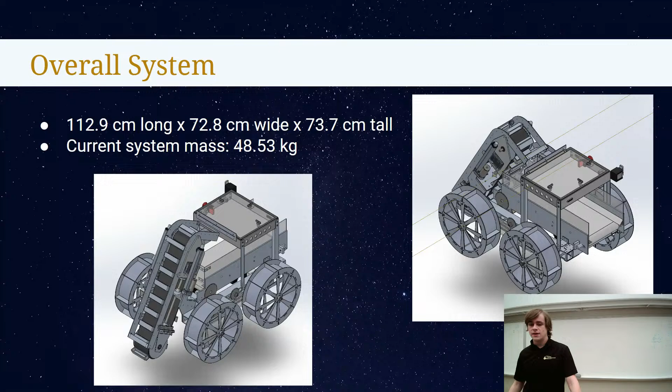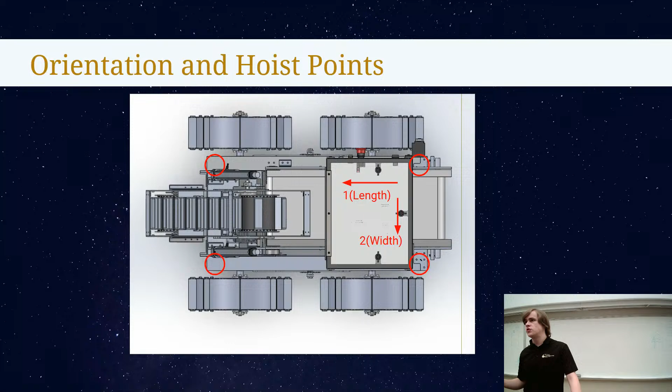Now the orientation and hoist points: the two arrows indicate the directions of length and width on the robot as required in the NASA rulebook. So length is going to be parallel to the wheels, and width is perpendicular. Also circled in red are the 4 hoist points for the robot. These will be installed with eye bolts, and then we'll have clips inserted into them to lift the robot, as was in last year's design.

And then one final note on the high-level robot overview is that we have new motors this year, which require special dust protection, as the integrated motor controllers are not sealed against dust in the way that we need. So this is going to be accomplished with two-piece 3D printed motor covers. They're going to have an XTC 3D printing coating applied to them to smooth them out and seal them.

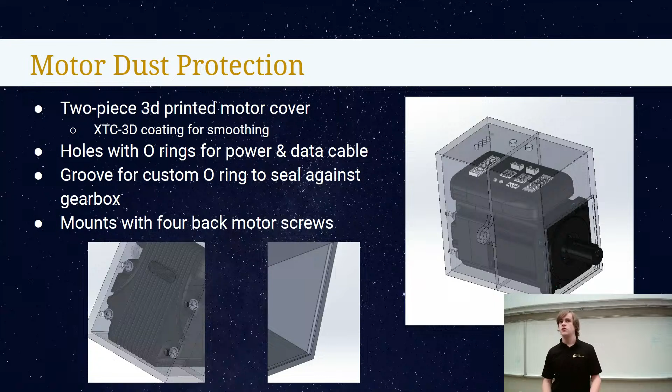There are going to be 6 holes for the required power and data cables, and we're going to have O-rings inserted into grooves such that the cables can seal against the O-rings. And then there is an additional groove in the front for a custom O-ring, which will be sealing against the gearboxes in order to seal off the entire interior of the motor, and then it'll mount at the back with the 4 motor screws, the same motor screws that hold on the motor controller currently. So with that, we conclude our high-level robot overview, and we can now move on to systems.

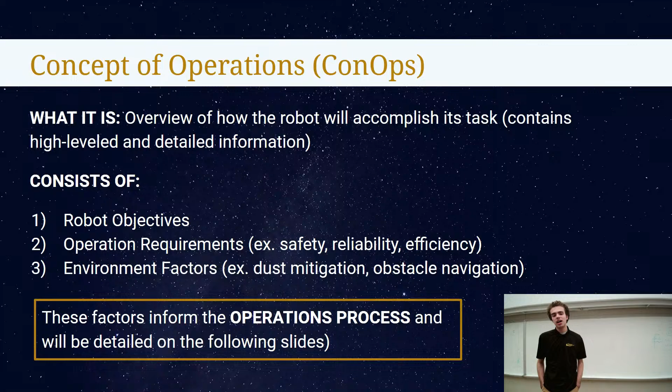Okay, so the first thing we're going to talk about for systems is the CONOPS, the concept of operations. This is an overview of how the robot will accomplish this task. It consists of the objectives for the robot, the requirements the robot must meet while achieving those objectives, and any environmental factors that will impact the objectives and the requirements. These all inform the operations process, which will be detailed on the next few slides.

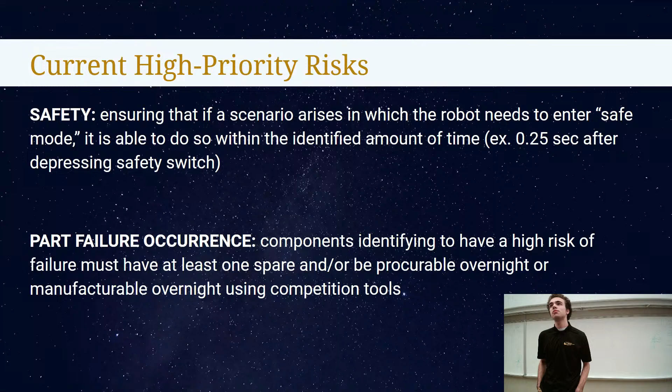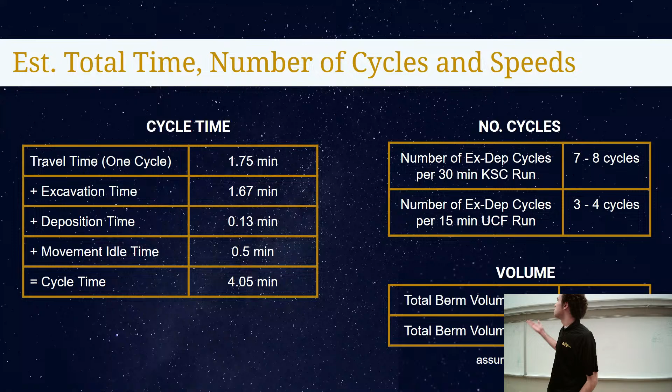You can see how that translates into how many full cycles we can do in a cycle - going to the excavation location, getting regolith, bringing it back to the deposition location. You can see how many cycles that translates to for both the 30-minute KSC run or the 15-minute UCF run. And if we assume about 10 liters per cycle, which would be about half the total volume of our regolith storage, you can see how much volume of regolith would be deposited.

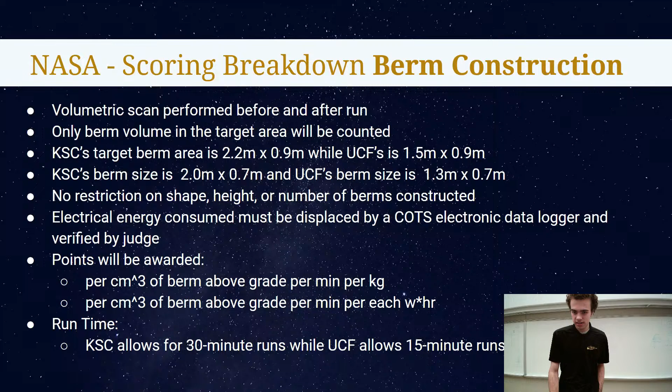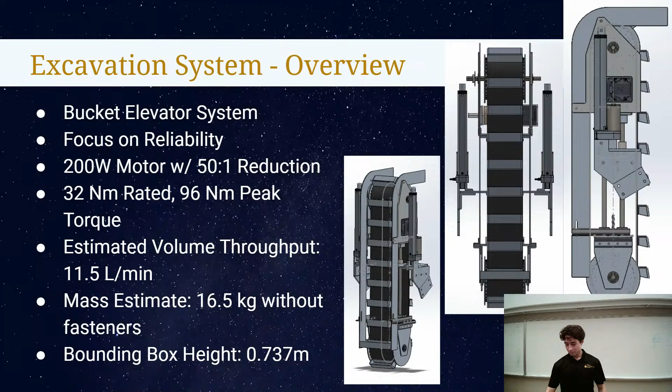Now I'd like to speak a bit about our structural design. We're going with a 3-rod structural design. As you can see in the bottom photo, we have 3 rods spaced apart in a triangular pattern. This has worked out really well in the past; our system hasn't had much rigidity issues with the rods, mainly because they're made out of steel, so no deflection of the rods.

One thing we're changing this year is we decided to spread the rods further apart, mainly because last year we were experiencing some bending in the top plate. So we're moving those out this year. That should fix the issue because most of the load on that top plate is near the outer edges, and by placing the rods closer to the load, it should reduce the stress and bending on that plate.

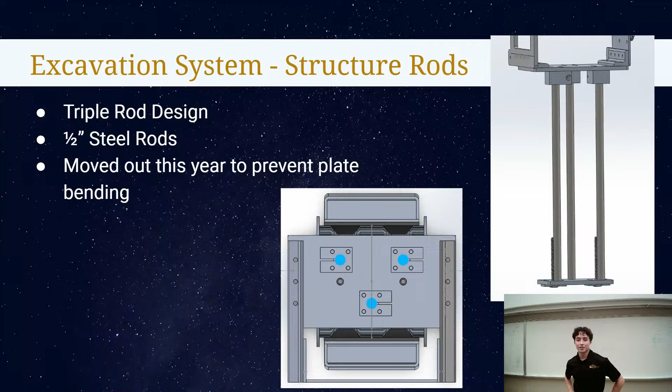When we wanted to move the 3 rods apart, we incorporated all of our parts used in previous years to support the rods. However, these supports that guided the rods were a little too big and had too large a radius between the screws that went into the plate. Because of that, we needed to redesign those, so we went with custom rectangular supports that bring the radius of the screws closer to the plate and have a smaller radius, utilizing a set screw to hold it all together.

We also changed the pancake tensioner this year. It's fixed on the bottom, a screw fixed on the bottom with 2 guides that fix the rotation of the rectangular screw head. This is different than previous years, because previously we had to get a grip on the screw and a nut to tension a pancake tensioner.

This year, fixing the rotation of the screws and having 2 will not only increase the amount of force we can apply, but it also means instead of having to finagle our way into the robot to grasp both the screw and the nut, we can just screw the nut from the top, which should make the entire process easier.

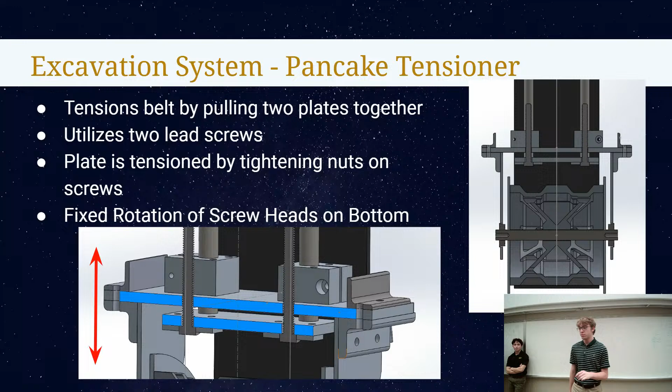All right, so this year we are moving back to a bucket elevator. So for that, we need buckets. Our plan is to weld two different pieces of sheet metal or L channel together.

We have an L channel, which will be 1 inch by 1 inch and 1/8 of an inch thick. And we'll have another piece of bended sheet metal that'll have 2 bends on the sides and is also 1/8 of an inch thick. These will be welded together at the bottom of the L channel, as you can see at the bottom of both pieces, and then at the back side.

The entire bucket will be about 1.2 inches by 1.1 inches by 4.5 inches, and it'll be fastened to the belt with bolts.

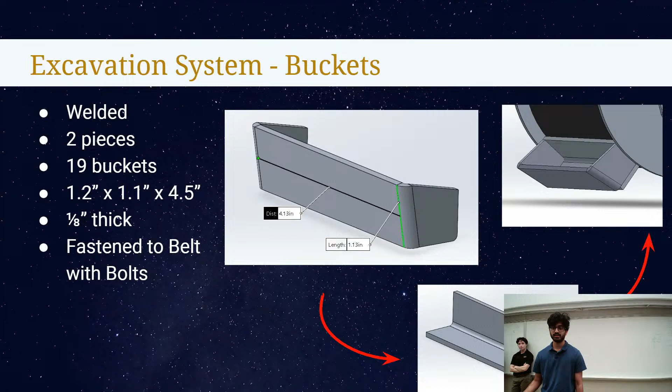So new this year, we have a dust cover on the excavation system. This is to prevent dust from being spewed about. With the bucket elevator this year, since we're going to be running it much faster than we have in the past, it will require more protection to prevent dust from being spewed all over the place. In addition, it also prevents debris from being shot out of the back, so it's helpful for safety and for preventing things from getting damaged.

Additionally, we have 2 parts of it. We have the frame, which will be what connects the dust cover to the actual excavation system itself, and then the actual cover will be made of a nylon fabric. We decided on using coated nylon because we went through a bunch of different fabrics, and we were like, okay, which one has the strength that we need and is resistant to abrasion and tearing and all of this. We settled on coated nylon because it just was the best of the options that we looked at.

So with the frame being connected to the excavation system, it will be connected at 3 points on the top, middle, and bottom for stability. Each one's going to be fastened with an L channel and then screwed in. For the actual cover itself, we're going to be putting some holes into the fabric and then creating eyelets, which will then go on top of holes on the frame, which would then be fastened using rivets.

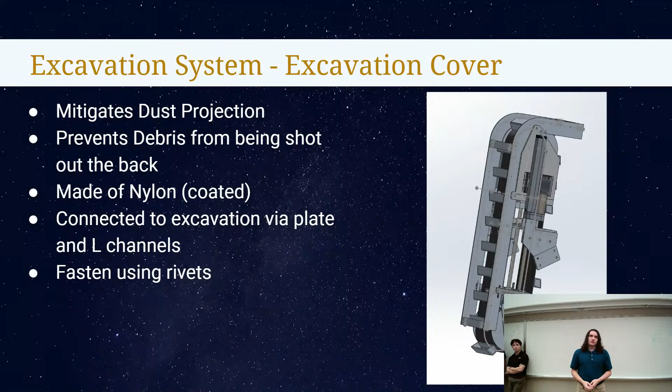All right, so in terms of our actuators, we are using linear actuators. We have 2 of them in our system, and they're going to be the same ones that we used in the past years. Each of them have 8-inch strokes, and they're both rated for 50 pounds of force, which means in total we have 100 pounds of force for our system.

The system will be actuated into the ground, so kind of expected out of excavation. The major changes we're doing this year in terms of our actuators is how we're mounting them. In past years, we mounted our actuators by seating it through the support plate, and it was held in place by a pin, which proved very difficult to reach and actually secure.

So this year, instead of that, we're going to be securing it on top of the support plate, and it's going to be fastened between an L channel and then an extension of our side support plate on the excavation. And that pretty much wraps it up. I'm going to pass it along.

Okay, so now we're moving on to our DFMEAs. We evaluated various failure modes of our system, and I'm just going to go over a couple of them that I think are pretty important.

So first, I'd like to go over the buckets and what may happen with them, especially with the welds we're doing this year. We haven't proven the welds yet, and we don't know exactly how strong they are. They should be strong, but it all depends on our welding skills. So we're a bit worried about the buckets possibly deforming or the leading edge maybe falling off.

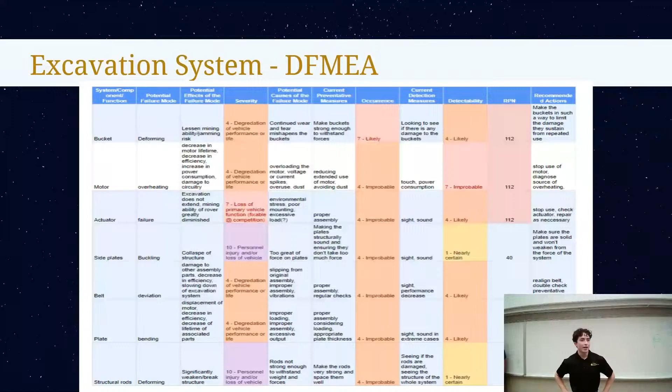And to wrap up with our priorities moving forward, first, we will implement the feedback from this design review. That'll be a main focus between now and the next one. And then we'll also be working on dust covers since we don't have those done yet. And also inserting fasteners, exploring more weight-saving options. And then we're gonna start running our mining force experiments and then start experimenting and training with welding the buckets. So that pretty much wraps up excavation. So now I'm gonna open up the floor to any questions.

We have one question from YouTube right now, and they're asking if we have any plans to do any destructive testing with extra buckets, to get an idea of when the buckets will likely fail. So the question was, will we do destructive testing on the buckets to figure out when they fail? It is something we can explore. We haven't done that much in the past, but we do have a lot of manpower this year to try and work on that. And maybe it's something we can do alongside our mining force experiments. So I'd definitely like to explore that this year.

So for your buckets, first of all, what alloy are you thinking for your 1/8-inch bends? So the question is, what alloy are we thinking for 1/8-inch bends? So the buckets will be made out of aluminum 6061. I've gone and asked the people at Bechtol's Hot Works to see if it was actually possible. And they said that aluminum welding is actually possible on 1/8-inch. They gave us some feedback on our design and we implemented that. And they said it's possible and shouldn't be too hard. So I'm not too worried.

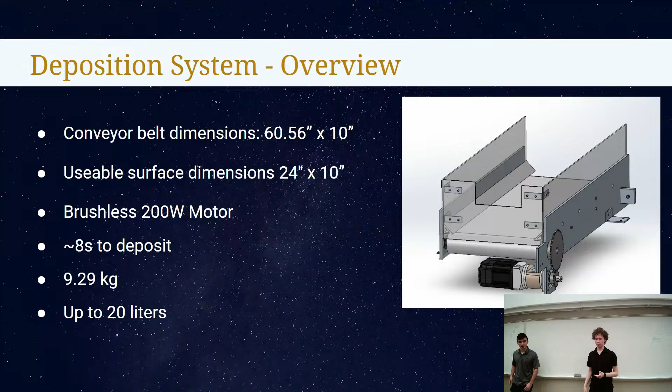Hello. So for this year, we decided to completely redesign the deposition system from scratch and replace the old deposition system with a conveyor belt. Dimensions of the conveyor are going to be 60.56 inches by 10 inches. The usable surface which regolith will be deposited on will be 24 inches by 10 inches. It will use a brushless 200 watt motor and take around 8 seconds to deposit. The current weight of the system is 9.29 kilograms, and it can hold up to 20 liters of regolith.

So for the structure of the deposition system, we have a couple different walls. The darker gray walls are 1/4 inch aluminum, which provide the structure. Everything is attached to them. The pulleys are attached to them, and the other walls are as well. The motor is in the bottom of this picture here. We're going to have 2 pulleys and then 2 idle rollers in the middle there. And then one is going to be an active pulley with a motor.

There's going to be 3 additional 1/8 inch polycarbonate sidewalls, which are just meant to keep the dust in, not actually bear any weight, so they don't have to be super rigid. We're also going to have 2 3D printed triangular ramps. We're going to show those in the next slide, but those are going to keep the dust from falling through the outer edge of the conveyor and hopefully funnel it into the center of the conveyor so it doesn't get lost.

So the triangular side ramps are basically 3D printed pieces of plastic which will be covering just above the surface of the conveyor belt. This way it will hopefully prevent the regolith from getting lost through the gaps on the sides of the conveyor belt and prevent any friction of the conveyor belt with the sidewalls.

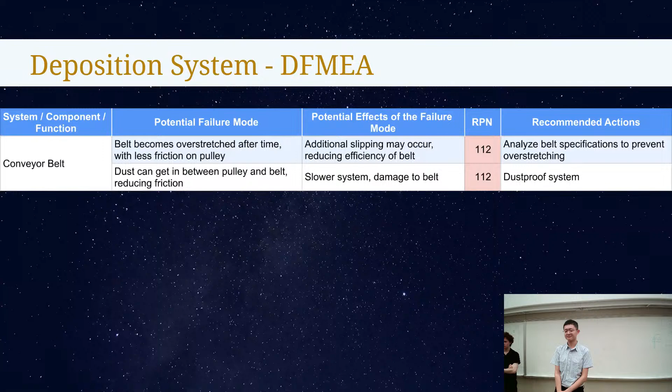So priorities moving forward are to optimize the triangular side ramp for 3D printing by breaking it into multiple parts which can fit on the 3D printer bed. Another priority is going to be dust mitigation and dust protection. We will design dust covers for pretty much everything and analyze what else can be done to prevent regolith from damaging the system.

We will also implement weight reduction measures, research the possibility of active dust mitigation, and start preparing for manufacturing by inserting fasteners, choosing our parts, making plans and optimizing for manufacturing. We will also research alternatives and look into custom manufacturing for some of the parts, mainly the driving pulley, because it's pretty expensive as we have it configured right now. So we might make it custom or see if there are other suppliers with better pricing.

Does anybody have any questions? Peter? A couple questions. First, the triangular side ramps, how long are they? They go through the entire length of the robot. We might make them even longer. In terms of length, they're 24 inches long? Yeah, 24 inches long. Okay. Do you plan to split that up into multiple pieces that are connected together? Yeah, basically, we'll probably split them into a few pieces, which will be 3D printed separately, and then connected together. Okay, good.

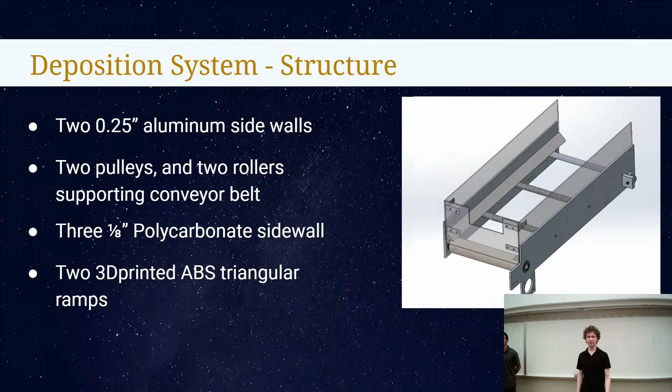Hans? Can you go back to the custom pulley tensioner? This one? Yes. So is that bolt just pushing on the axle for the pulley, or is that actually threaded? It's not going to be threaded into the shaft. The shaft is just going to have a flat side where the bolt will push against, and the block is threaded.

Max? Yeah, 2 things. First, with that ramp at the bottom of the triangle and the belt, what is the distance that you plan to have? Is it going to sit right on top of it, or how much clearance are you going to design? We're currently at maybe 1/8 of an inch, potentially slightly lower or higher depending how the testing goes. Since it's 3D printable, it's very easy to adjust by just shifting the location of the heat insert.

Okay. Yeah, because keep in mind that if it's too close, you'll have the belt rubbing up against it. And so if it's intended for that, if you want some sort of seal, you might need to do something to make sure that it doesn't have excessive wear on the bottom. If the distance is too wide, then you won't have the benefit of the sealing. So maybe that might not be the solution you need for that. But okay, that's good to know.

And then the second thing is, how do you plan on assembling the system together with the rods in the center? What's that looking like? Do you have an idea? The question was how we are going to assemble the system with all the rollers and pulleys in the middle. So the idle pulley and the driving pulley are using shafts, which will be inserted through the holes in the aluminum sidewalls. And for the rollers, they're a spring-in installation method, so you can just push the sides of the shafts into them and just slide it in.

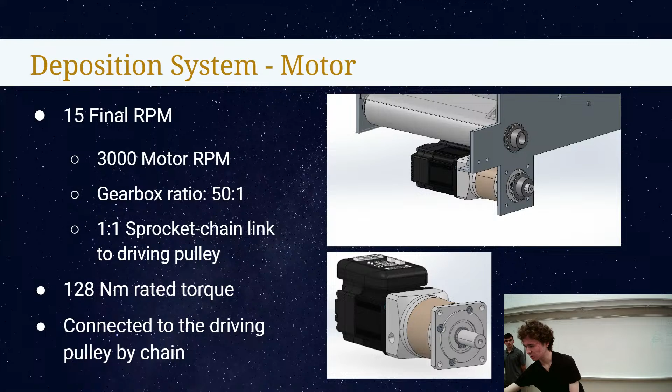Also, the picture's a little, the actual pulley that's on it. Yeah, the actual pulley is made invisible in that picture. So I'm gonna see if there's any other picture. I don't think there's better pictures than this. But in the back, there's an idle pulley with built-in rollers. So we will probably build something around there.

Any more questions? What's the thread size on that tensioner screw? Right now it's 10-24, but we might change it later.

Any other questions? Peter? Yeah, can you go to the back view of the system? Like the back view, yes.

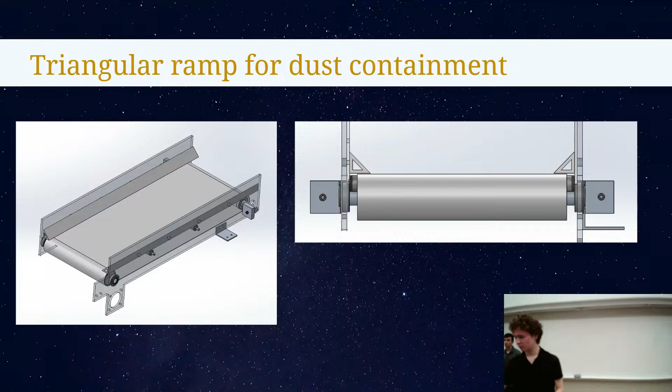So it looks like right now you have about a half an inch gap between the belt and the sides of the wall. Is there any particular reason for that, and could you make it smaller?

Main reason is the pulley, the idle rollers are designed to be wider than the belt. Both rollers are designed for an 11-inch gap, while we have a 10-inch belt, because the other size would be too small. Another reason is to prevent friction of the belt against the sidewalls, and we're going to use triangular side ramps to keep things aligned and compensate for those gaps.

Alex? So if there's a gap on either side of the belt, do you have a way to prevent the belt from moving left and right? We will connect something to one of the pulleys to keep it in place.

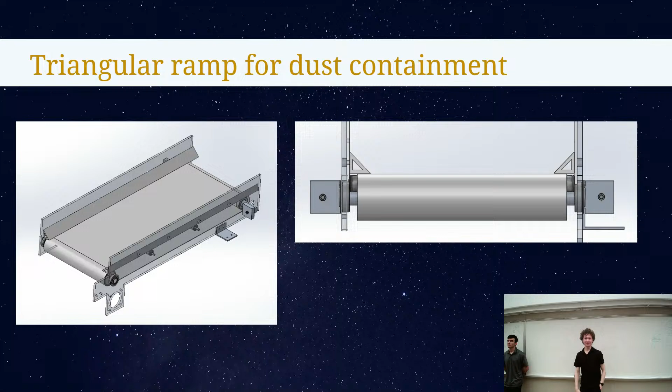I know for previous years, drivetrain has a tendency to fluctuate the channels and stuff, so keeping the walls in place isn't relying on that. Currently we mounted the deposition to the drivetrain mainly for weight saving measures. But if fluctuation would be an issue, we would reinforce it and try to make it a more independent sub-assembly. Hopefully it won't happen.

Okay, I'm gonna hand it off to... are we done with questions?

All right, we're gonna start with drivetrain, which is what our CAD looks like right now. This is our current top level assembly, just for a sense of scale. Okay, a quick system overview.

We ended up going with almost everything we had said we were gonna go with at SDR. So just a recap of that, we're gonna continue with the trend of a linear gearbox arrangement, so no 90-degree gearboxes. We're keeping our chain drive system. We had considered pulleys, but in the end, we're going with a chain drive.

We are improving our chain tensioner though. That was a concern from last year, so we have a solution for that.

We do have a new wheel design, so we're calling it the box grouser design. We're going with 1/8-inch square box tube with a weight savings pattern that is not in the CAD yet. We've been doing FEA analysis on several designs to figure out which one will work best for us.

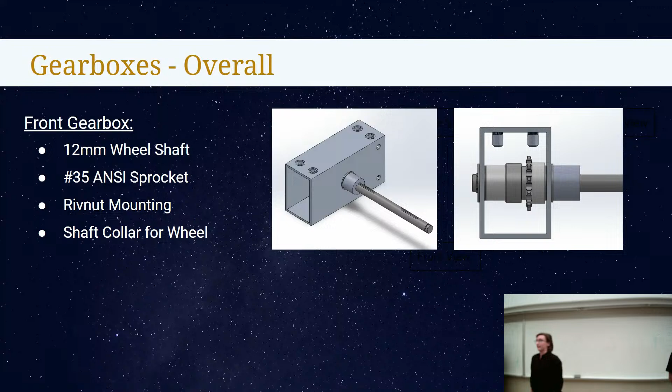Next up is our current chain tensioner design. We did a bit of remodeling because last year's needed updates. Currently our design is just to have a slot through the frame with a large sprocket that runs all tension of the chain. Currently pictured is what we're looking at. We're also looking into using a larger sprocket to get better tensioning.

Moving on to wheels - this was something we looked into a lot this year. From SDR to now, after the discussion from SDR, we had 3 designs originally, and we decided to let go of our dimpled design, and moved on with the box grouser and a mesh wheel design. Those groups will talk about their prototyping and results now.

For the mesh wheel design, we 3D printed the rims on the center support, and attached them using wooden dowels that went through holes in both the rims and the wooden support in the middle. Then we attached stainless steel chicken wire to it to imitate our idea of making a flexible wheel, and attached it all using zip ties to make sure it didn't come out. With that, we tested it for flexibility, sinkage, and traction.

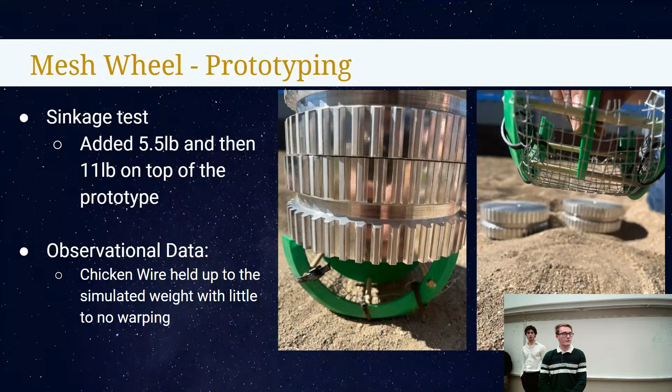For testing, we wanted to test sinkage and later traction. First we tested sinkage by adding 5.5 pounds on top of it, followed by 11 pounds to simulate the weight of the entire robot on top of it. There wasn't much actual quantitative data collected, but qualitatively we noticed the chicken wire was holding up surprisingly well. We expected some bending but found little to no bends at all in the wires.

Moving on to traction - during the traction tests, we first added 5 pounds on top of it, then added a force gauge and pulled it to see how much static friction there was on the prototype. For the first test, we did 3 trials pulling vertically, in line with it, and got consistent numbers all 3 times, which felt like good enough data for the force gauge we were using.

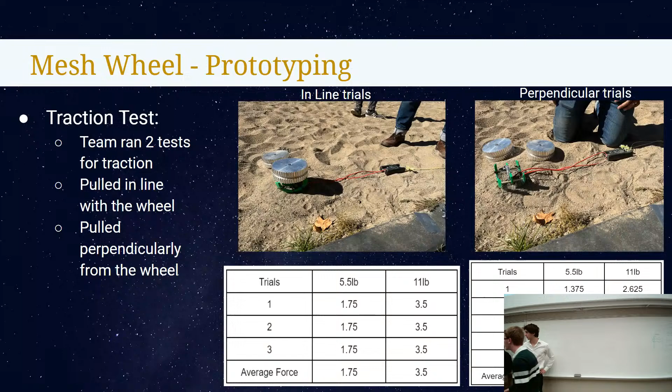For trial 2, we pulled perpendicular to the wheel, adding both 5.5 and 11 pounds on top of it, and got similar data that varied slightly. Overall, we believe the data fairly accurately depicts how well our design performs. However, moving forward, there's currently no CAD model, as we're moving forward with the other wheel design. So that was the mesh wheel design.

Hello, I'm part of the group that made the box grouser wheels, along with John and Anthony, and I'm Chinook. We performed two tests on two different types of wheels for our prototyping phase.

One was with the box grouser wheels, and one was with a wheel with chamfered edges. I'll show a photo of what both look like. First, let me go over our prototyping and testing process. We performed the same tests as the group that did the mesh wheels, with only an 11-pound load on top of the bottom 30% of our wheels in CAD, which we 3D printed. Then we performed a test for traction and a test for sinkage. The traction test involved taking that bottom part with the weight on top and pulling it with a force gauge parallel to the motion of the wheel. For sinkage, we pulled it perpendicular to the motion of the wheel.

These are what the two designs looked like. On the left is the chamfered edge design, which we took inspiration from the University of North Dakota, and on the right is the NASA Viper rover box grouser wheel. For the box grousers, the rims come up off the edge above the surface of the wheel. For the chamfered edge design, the actual floor of the wheel extends past the rims and is angled downwards.

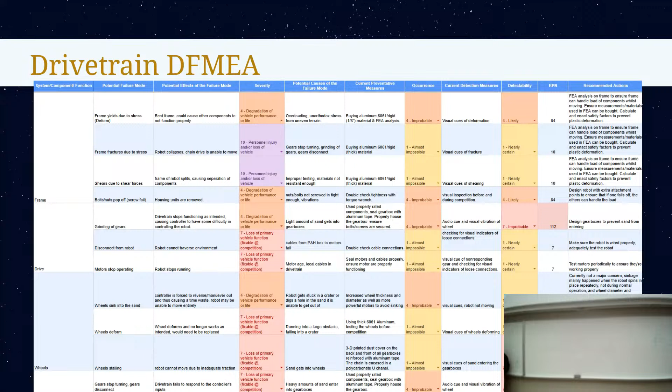This is our DFMEA. It's pretty consistent with what last year's was. The main concerns basically boil down to bending in any of our components, but with the amount of FEA we're doing this year, we believe that no failure is likely to happen. I believe the highest probability on there is improbable. So I think we're looking pretty good everywhere else. I don't think there's anything much more to say about that.

Our priorities moving forward: our chain tensioner. The way it is currently in CAD, our sprocket might not be large enough to fully tension it to get a full chain link difference. That is something we had discovered last year. We didn't do that analysis, and we paid for it with having to move the gearboxes impromptu, and that was not great. So we're gonna do more analysis on that.

Frame weight savings and access holes, those are in development and very nearly done. It's just completing the FEA analysis, which couldn't have been done until we had full CAD ready. Continue preparing for wheel manufacturing. That's figuring out how exactly we're gonna make that floor. Tolerancing all our dimensions to make sure that things are gonna go together easily and there's not gonna be any tough fits. And then dust covers still have to be done. That's it for drivetrain. I'll now open the floor to questions.

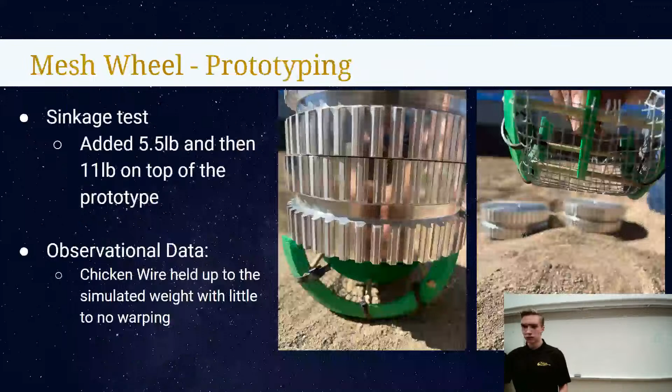Sophia. We have a question online asking, will the robot be spinning in place again for localization? Will these wheels work well for that? The question was, will the robot be spinning in place for localization? Software is giving me a thumbs up, so yes. Based on the prototyping results, I would guess that this wheel design would be excellent for that, based on the amount of traction they get. Yes, Peter.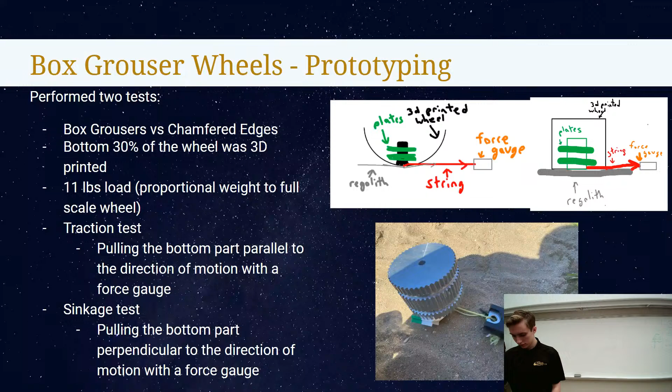Yeah, Max. Can you go back to one of the first slides with the total ground clearance? Yeah. How is that calculated? Because it looks like the ground clearance is from the bottom of the box tubes to the very tip of the wheel. Do you see that as the ground clearance you have when you're driving with the sinkage and everything? These are more just general estimates. I just went straight to the bottom of the wheel as a best case scenario kind of thing.

If we were to be more accurate with eyeballing sinkage, my guess, drop both these numbers down by maybe an inch, but that still puts us at like 1.5 times our clearance from the previous year, give or take. So we're still not concerned. Unless we experience severe sinkage issues, which I don't expect to, we should still have a decent amount of room.

All right, and then staying with this image here, the side rim of the entire thing. In the NASA picture, the area in between the perpendicular grousers kind of narrows down, or the height goes lower a little bit. Have you considered that as a possible weight savings, where when it's further from the perpendicular grousers, you cut in and lower that height a little bit? You're talking about the wheel right there.

Oh, so the question was, looking at the boxes on NASA's wheel, it tapers down for weight savings, and there's holes for weight savings. Yeah, that's something we could consider. We haven't considered it just yet, just for the simplicity of the CAD design and testing it, but yeah, that's something we could consider.

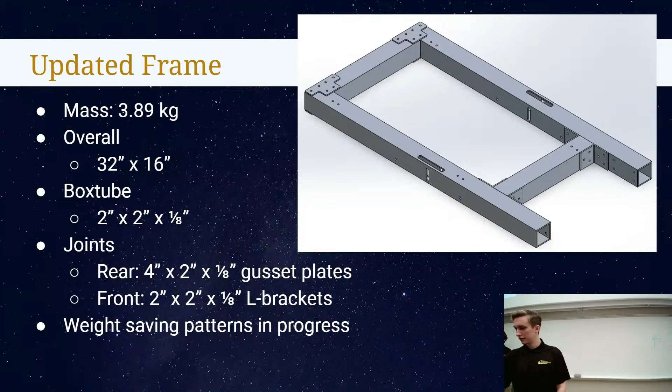Peter. Okay, so talking about the chain tensioner. Yes. I'll give you a second to pull up the appropriate slide. Perfect. So your current design is just a bolt with a nut on the end. How many? So just one for the logistics. Is the bolt going to go all the way through the frame? Yes, so the question was for this chain tensioner, is the bolt that holds the sprocket on going to go all the way through the frame? The answer is yes, it will. Okay. So does that mean there are going to be 2 or 1 nuts on this bolt?

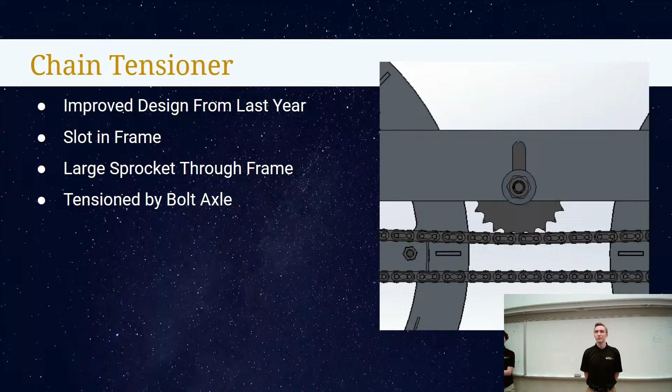No, because you could have one on the inside and one on the far side in order to provide more support, right? But if you have that one nut, the sprocket is going to be running directly on the threads of the screw. So the question was, will the sprocket be running directly on the threads of the screw? The idea is to get a bolt which is partially threaded so that the sprocket runs on the smooth part, and then the other end beyond the sprocket is threaded for the bolt nut. Okay, so then you're going to fasten it on the other end.

Okay. I'm concerned because we've had problems with tensioning designs like this in the past. We used them on deposition excavation last year, and in the course of the vibrations, especially in the drivetrain, obviously a very vibration-prone system, they were prone to loosening and losing tension. That might be mitigated by the use of nylocs. Are you considering a more direct tensioning system where the rod would be axially tensioned?

So the concern brought up was whether this system would loosen over time due to vibrations. That is a very serious consideration, which we just haven't had the time to fully consider. No, we don't have any definitive plans to tension it axially, but if we come across a design or a suggestion that allows us to do that, that is definitely something we would strongly consider implementing. But it might just have to be that we retension this after every run, which isn't a huge deal, but it is a slight inconvenience.

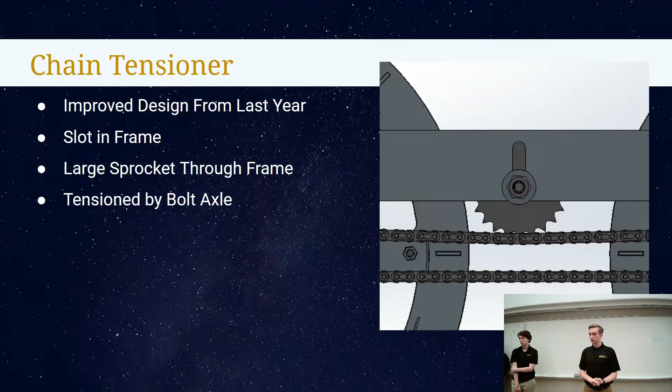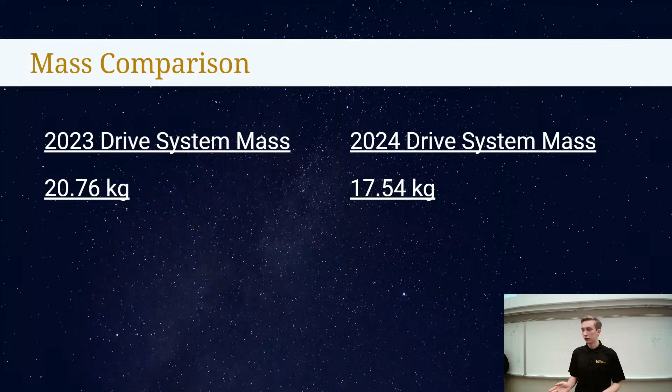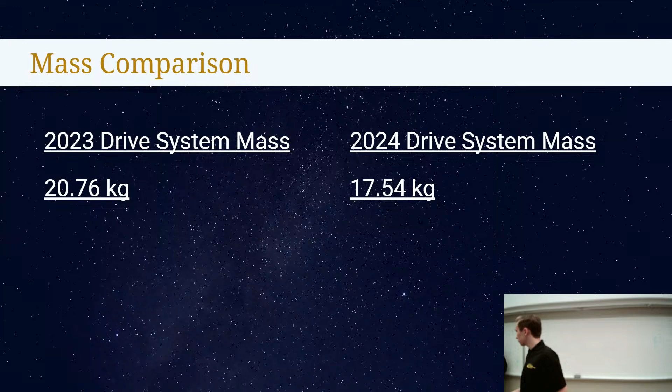For clarification, the question was where the motor weights were being accounted for. The frame mass on the slide is just the mass of the frame, and the overall system mass includes the motors. And ideally, when you're doing cutouts, how much weight do you want to shave off the frame? The question was how much weight do we want to shave off the frame? It's really going to depend on how much we can take off without compromising the structural stability of the system. Yes.

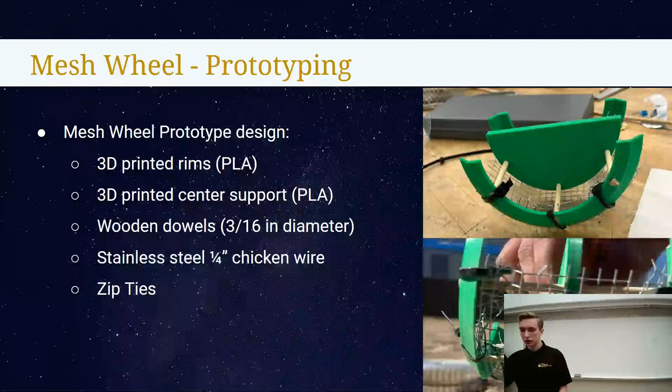Have you found a pipe that would be big enough? That would be a huge pipe. We got sent multiple pipes from asking around, but none with the correct thickness. Okay. And we also have to machine it out. Exactly. So I thought that was a very creative idea, but that isn't large. Yeah, that's like an oil pipe.

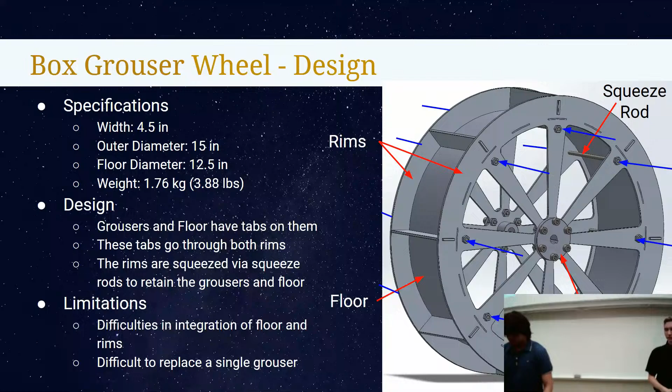Another idea we had, let me just go to the next slide, about constructing the floor: if you look at 2 at the right there, take the best of both worlds from the mesh wheel and our wheel and replace that floor, which John was talking about, with a mesh. It could ease the manufacturability, because looking at the photo of NASA's wheel, it looked like they were just connecting it from grouser to grouser. It didn't look like one whole cylinder of mesh. So that could ease how we attach the floor or mesh, if we decide to do that. That was just one idea.

Yeah. You don't want to take something new and try to make that a circle. It's going to create stress points in it, and then when you try to weld and fasten it at the top, you've got an imbalance with it. So I'd go with the second option and hold the mesh that way.

My other concern is you've got 4.5 inch rims. Basically, that wheel's going to start moving more like a steamboat paddle, since your surface area and weight ratio is going to start to shift over. So it's going to start to dig in, like how a steamboat works, right? It's going to start turning the gravel around instead of actually moving forward. Okay. So the concern was that with the wheel size and the way the wheels are spaced right now, it would dig into the regolith very quickly.

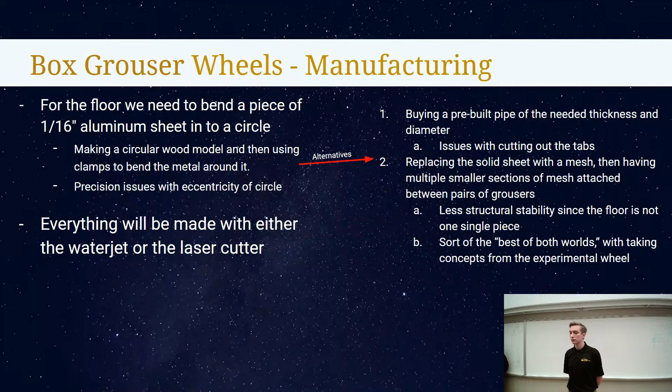Julian: With all the weight saving holes in the frame you're trying to add, is dust getting into those holes any concern at all? So the concern or question is regarding the weight saving holes in the frame that will eventually be added. We will plan to put dust covers on there. There are several ideas, between just 3D printing one for every single hole, which is kind of a nightmare.

Another popular option is taking a really thin, like 30-thousandths sheet of polycarb or some material like that, and then just covering and lining the entire length of that system such that no dust can get in there, and it basically doesn't contribute to the weight at all.

Alex: Are you planning on leaving the sides of the wheels open, or are you planning on covering them up? That's going to really depend on how they perform when we actually get to that point. Sorry, the question was whether we plan to put covers on the side of the wheels to stop regolith from getting into the sides. If we put covers on the sides, it would only further worsen the sinkage and turning problem, because it would stop the regolith from flowing through and escaping out of there. It's something that we could easily add on in the future, but we haven't really considered whether we want it now or not yet.

Max: Do you have any plans to use welding for any parts of either the wheels or the frame, maybe reducing fasteners in the frame? So the question was regarding welding, whether we plan to use that anywhere to reduce the need of fasteners. This system was designed with the idea of being able to easily take apart any component, and welding kind of defeats the purpose of that. There are probably some areas and joints in the frame that could be welded, but when you weld, you lose a lot of that reliability and precision, which, with all the other systems that rely on it, is not something we want to potentially mess up.

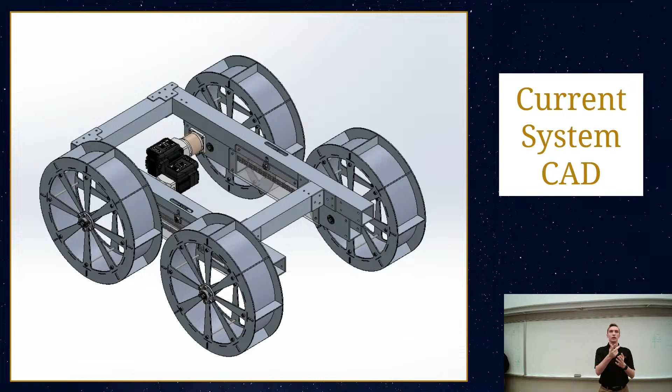The squeeze rods for the wheels, are those custom parts or purchased? So the question is, are the squeeze rods for the wheels custom parts? We're thinking those would be 10-32 threaded rod with a spacer in the middle, at the length of the width of the wheel. So a 10-32 rod that's 4.5 inches long plus? Yeah. So are we buying those or making those? I think you can just buy threaded rod online; I think it comes in that length. All right, that's not hard.

Any other questions regarding gearboxes, frame, wheels? Peter?

So the grousers, it's my understanding the grousers are only attached via the slots on the sides of the rims. Are those going to be clearance fits or interference fits? So the question is with the grousers, the understanding is that they are only attached by the rims on the side. That is the correct interpretation. The question is, will they be attached with clearance or interference fits? Probably clearance fits would be my interpretation of it. Okay. I'm not sure if you have a different answer.

So do you want them to be able to freely go in and out, or do you want them to stick? I guess stay. We were thinking about chamfering the edges of the tabs so that when we squeeze the rims together, they almost wedge themselves into the rim, if that makes sense. Yes, so right now the grouser is a constant height? Yeah, right now they're constant height. Okay, I would probably want them to instead have a small step down, and then have it be a clearance fit such that it's easier to assemble, right? Yeah, so Peter's suggestion was to modify those grousers so that there's a step down and it's a clearance fit into the rim. I think it's a good suggestion for assembly.

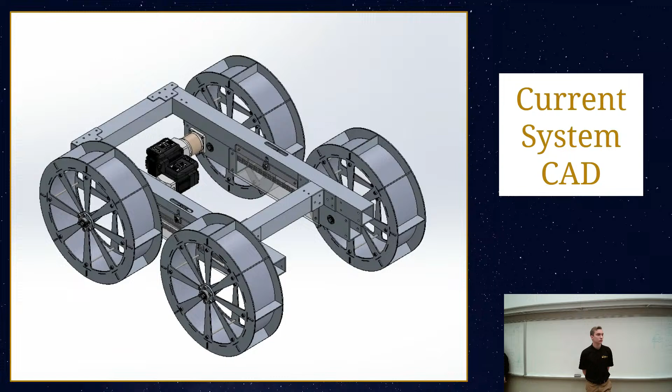Question from earlier as well: how does the output power and torque of the motors compare to previous years, like through the gearboxes typically? So the question was, how does the output of the motor compare to the wheel, previous year's? How does the output of the motor compare to previous year's motor? It's significantly higher, previous year's yes.

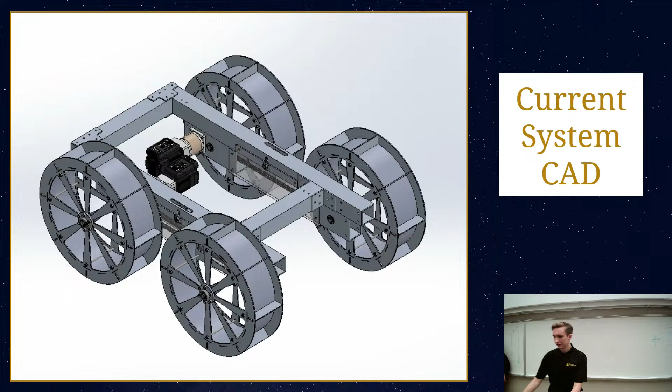Motors were 30 watts, these are 200 watts, and brushless. So is that torque like 3 times higher than the old one? I don't remember, that torque is like not even, is irrelevant. I think it's almost an order of magnitude larger. So these motors are significantly more powerful.

That is why we have it set to achieve the same motor speed as last year. We only have to run 36%, and that's with significantly more torque. I'm not exactly sure what the torque numbers were from previous years though.

But to address that, I don't believe stalling will be a concern. I believe if that were to happen, we would have failure points from the keys or elsewhere before that we damage motors.

Are those slots on the shaft for keys? They are. So the question was whether those are slots on the shaft for keys. The reason it is that way is because we plan to buy this shaft directly from Misumi, manufactured. We found that it's approximately the same amount of money to buy a pre-manufactured shaft with the key rings or keyways and the retaining ring grooves.

The same amount of money is to buy a full key shaft, at which point we would still have to manufacture a retaining ring in there. So is the only thing holding the wheel on that retaining ring? Holding the wheel on, it's not pictured here, but there is a shaft collar on the end for the wheel that will be right here. It's in the other assembly, so it's not pictured in this one.